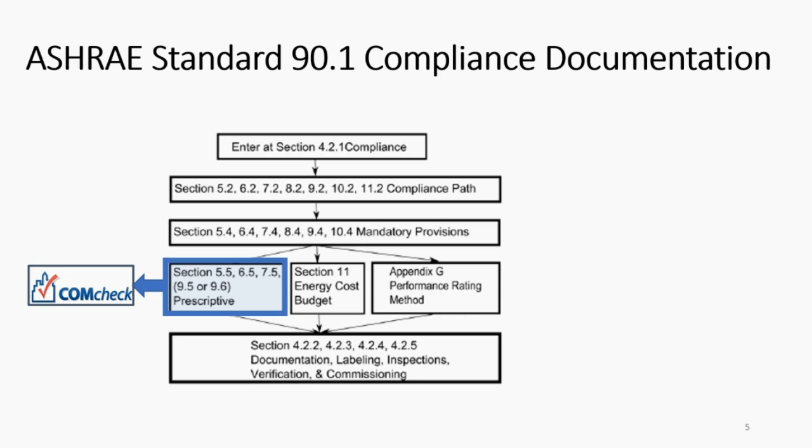However, for the performance-based paths in 90.1, which are Section 11 and Appendix G, previously there was no equivalent to ComCheck. However, now with funding from the DOE, a compliance form was developed in order to document performance-based compliance per the requirements of 90.1. Similar to ComCheck, in addition to supporting the reporting requirements of 90.1, the compliance form also includes functionality to assist reviewers in verifying that the project is in compliance. For example, and you'll see this today, there is a quality control checks tab in the compliance form that automatically flags inconsistencies and potential areas of non-compliance in the compliance form.

I just want to provide a high-level overview of the compliance form. It supports ASHRAE 90.1 2016 and 2019 for Section 11 and Appendix G. It's posted at the DOE Building Energy Codes Program website.

Just a brief summary of features: it's in the Microsoft Excel format, and like I said before, it provides a format for submitters to meet the reporting requirements of 90.1. It has built-in calculators and code lookups to help modelers establish modeling inputs. And it allows importing simulation results from the popular building energy modeling tools directly into the compliance form. It also automates the compliance calculations, which for Appendix G can be quite complex.

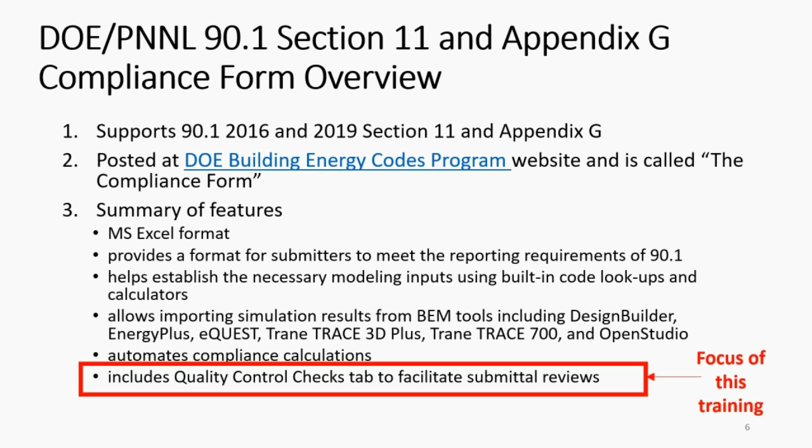It also includes a quality control checks tab, which is designed to help facilitate the submittal review process and is a companion to the review manual, which I will talk about now. But today's training is focused on this quality control checks tab.

It includes strategies for prioritizing the submittal review, essentially strategies for deciding which review checks to conduct. It includes a list of review checks which are implemented in the compliance form on the Quality Control Checks tab. So the Quality Control Checks tab includes all of the review checks in the review manual.

For each check in the review manual, the relevant sections of 90.1 and their requirements are described. There are review tips, including the specific steps for actually conducting the review and where to find the information in the compliance form to verify compliance with the review check, and then a discussion of common mistakes.

It also includes simulation reports that are annotated for the common building energy modeling tools, and on these reports are tips for conducting the actual review checks. The focus of today's training will be on these high-level concepts associated with the review manual.

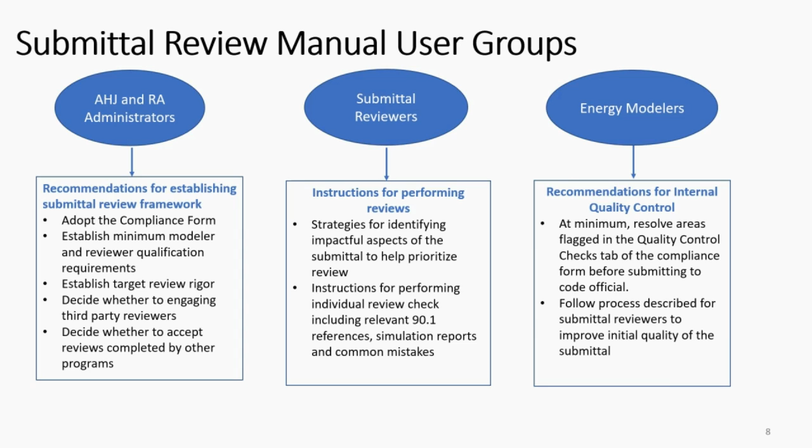So now we're going to go into some general submittal review concepts. Let's start with the general concept of performance-based compliance.

In performance-based compliance projects, there are two models: our proposed design model and our baseline, or in the case of Section 11, our budget design model. For the baseline or budget design model, the modeling inputs are based on the requirements of 90.1. For example, for Section 11 projects, the baseline model inputs for efficiencies and other building components are set at the prescriptive and mandatory requirements in sections 5 through 10.

The proposed design model is basically the building as designed. To determine compliance, the energy cost associated with the proposed and baseline models is compared. There are some things that are consistent across the two models: it's required to use the same simulation tool, weather file, and it's required that the utility rates be consistent across the two models.

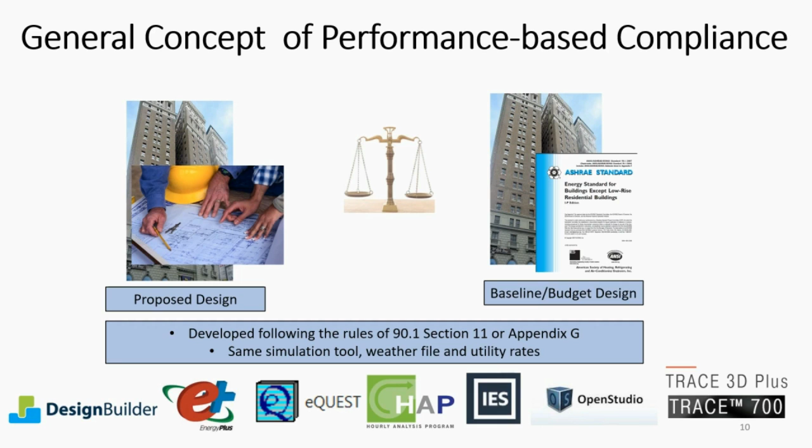I'm not going to dive too deep into these different aspects because we're going to go into them deeper on future slides. So as I said, step 1, you check the submittal for completeness. Step 2, you need to develop a general understanding of the project in terms of number of floors, square footage, the different building areas, whether there are any yet to be designed systems.

Step 3, establish the review scope. Which checks should be included in the review? What are the impactful systems and components? This is actually automated in the compliance form, and a preliminary recommended set of checks is provided for the reviewer.

Step 4 is where you actually perform the review, and this will be performed using the Quality Control Checks tab in the compliance form, while you have open the actual review manual so you can consult it for details regarding each check, and so you can look at the annotated simulation reports in the review manual.

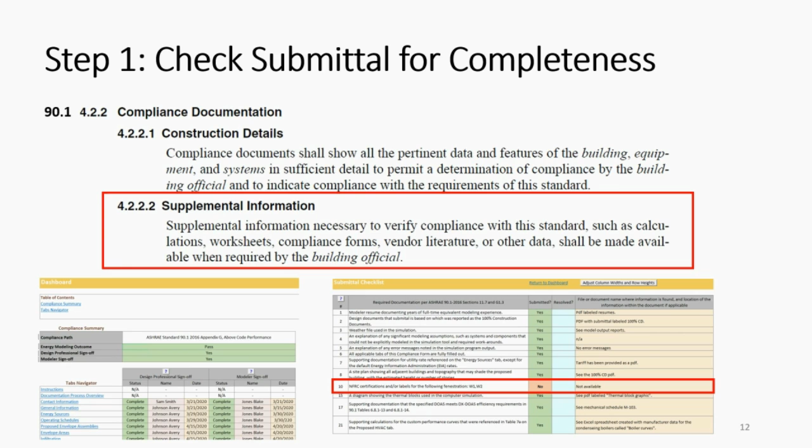And lastly, I want to point out item number 10, boxed in red on the submittal checklist below. This is where the design team or modeler marked not available for the NFRC certifications or labels for fenestration. This is a very common issue, so we suggest you consult the review manual. It has a list of appropriate documentation for this particular item, as a way to know exactly what to look for when reviewing the documentation submitted for a particular submittal.

Okay, step 2 is to develop a general understanding of the project. This is primarily done in the compliance form on the general information tab. This is where you can see the square footages of the building, the different building area types, and the number of floors associated with each building area type. It's also where you can see if there are any yet-to-be-designed components or systems in the project, because these have special rules, so you'll need to know about them when conducting your review.

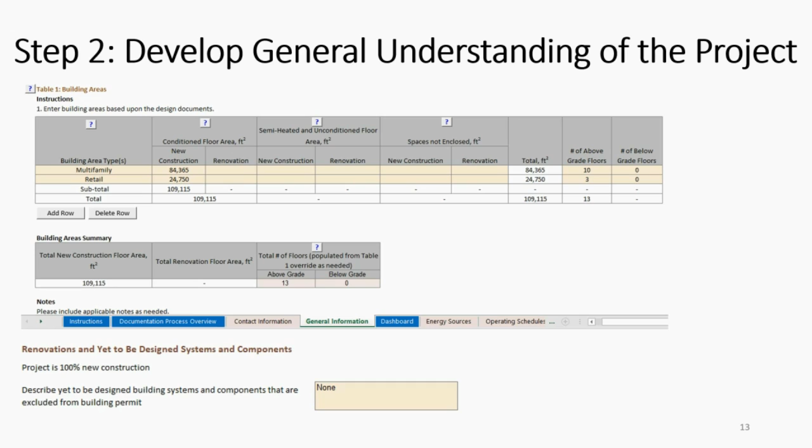Step 3: establish review scope. The first action for step 3 is to determine the impactful end uses in the project. First you need to think about the metrics used to determine compliance for your project. In 90.1, it's cost. Some jurisdictions use other metrics. In our example here, we're using energy cost.

This methodology is described in the review manual, but it involves three things. You need to figure out which end uses contribute the most towards the difference in energy costs between the baseline budget and proposed models. The top 3 in that category would be considered impactful. Then look at the top 3 end uses that contribute towards the total energy cost in the proposed design, and then do the same thing for the baseline budget design.

End uses that should not be considered impactful are those where trade-offs are not allowed. For example, for Section 11, trade-offs are not allowed for exterior lighting. So even if exterior lighting contributed significantly to the budget design, if it was one of the top 3, it would not be considered impactful because it's not eligible for a trade-off.

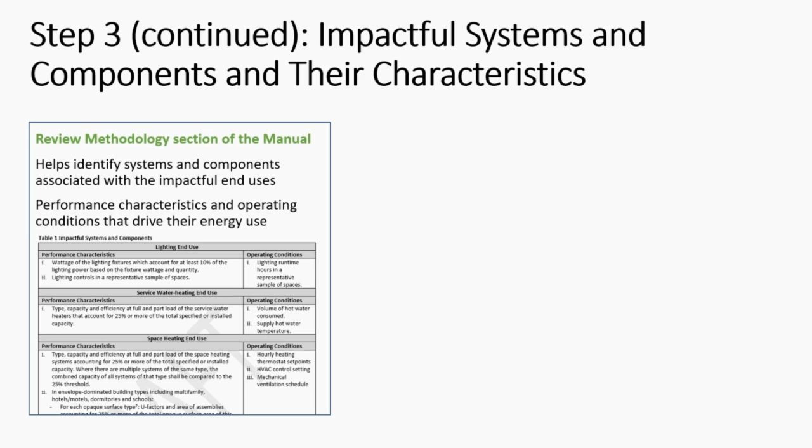Step 3 continued. Once the impactful systems and impactful end uses are identified, it needs to be determined which performance characteristics and operating conditions associated with those end uses drive energy consumption in the project. For example, if lighting is an impactful end use, we would look at table 1 in the review manual, which provides this information and shows that the wattage of the fixtures and the quantity drive energy consumption. In terms of operating conditions, the lighting runtime hours drive energy consumption.

The compliance form will select checks as yes or no based upon the automatically determined impactful end uses. So the compliance form will preset review checks using the methodology in the review manual that I'm describing here, based on the identified impactful performance characteristics and operating conditions. These will be the preliminary recommended review checks.

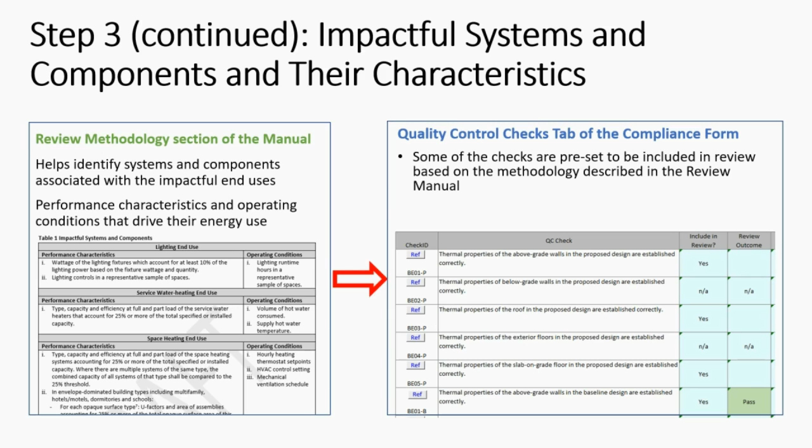Okay, so step 4 is to actually perform the review. First I want to start with the review check nomenclature that is both in the compliance form and in the review manual. The review checks are organized into the categories shown on the slide by building system, and each category has an abbreviation associated with it.

The review checks are in the format where it goes the abbreviation associated with the category, then a number, then dash either B or P, depending on whether the check is associated with the proposed design or the baseline budget. So as an example, check BE08-P is check number 8 related to the building envelope for the proposed design.

Step 4 continued, we'll go over the types of checks. There are 7 types of checks in the review manual, and they either apply to the proposed design, baseline design, or both. They're either always performed based on sampling, or only for impactful systems and based on sampling. You can observe that in the 2 columns on the right as I go through the different types of checks.

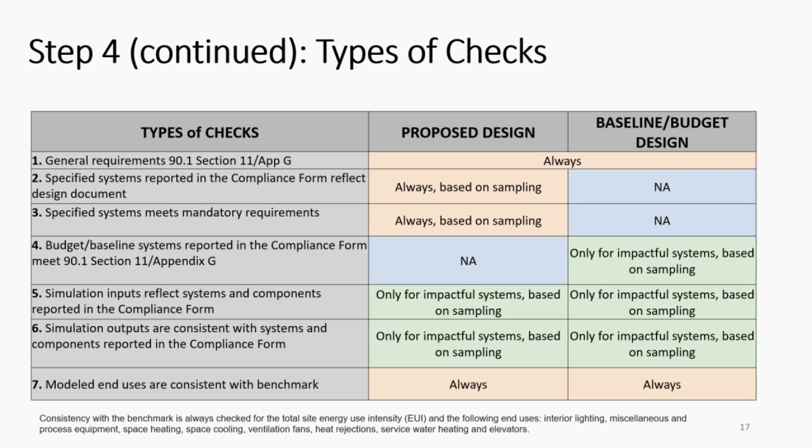An example of this type of check would be if the baseline HVAC systems have no electric heating, you would check to make sure that there's no electric space heating modeled in the baseline. And the last is whether the modeled end uses are consistent with benchmarks. We'll go into these benchmarks in more detail when we do the compliance form demo.

The next aspect of conducting the review checks that I want to talk about is coming up with the sampling strategies. This is included in the review manual, and there are recommendations for how to determine your sample. The compliance form has helper tables on the quality control checks tab to help with this process.

Just as an example, for checks that verify specified fixture wattages, for when you want to verify that the wattages reported in the compliance form are consistent with design documents, you want to focus on the fixtures that contribute the most to the wattage in the project. If there's a fixture that is 10 watts and there's only one of them in a project with hundreds of fixtures, it's not an efficient use of time to check that fixture.

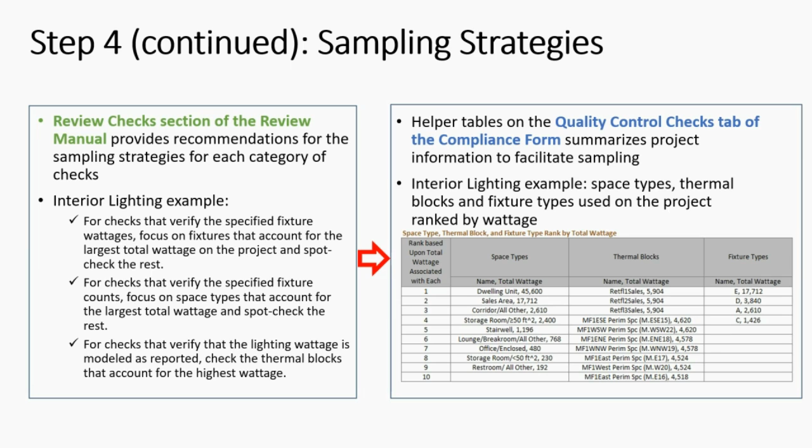Then for certain checks, the pass-fail review outcome is automatically set to pass or fail based on the information available in the compliance form, which can perform calculations automatically to determine the outcome.

For checks that are automatically determined as fail, there is a default review comment that populates automatically for that particular check. Actually, the Rev 0 iteration of the review is simply between the design team, modeler, the compliance form, and these automated checks. So they will need to address the checks or provide a response in Rev 0.

So the review check organization in the review manual is such that there is a check ID and title. Then, as I said previously, there's a description of the relevant sections of 90.1 for 2016, 2019, and for both Section 11 and Appendix G.

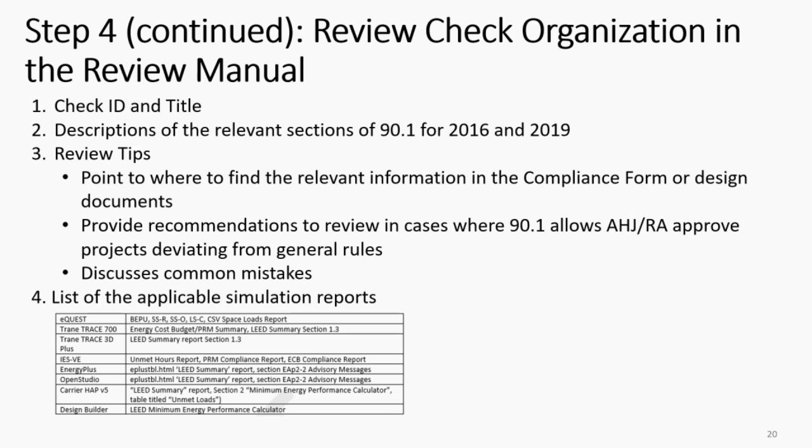There are discussions of common mistakes, and then there are lists of applicable simulation reports for common simulation tools. And then there's a simulation reports section of the review manual that consists of annotated simulation reports for the tools listed on this tab, and helpful tips on how to review these simulation reports to conduct the review checks.

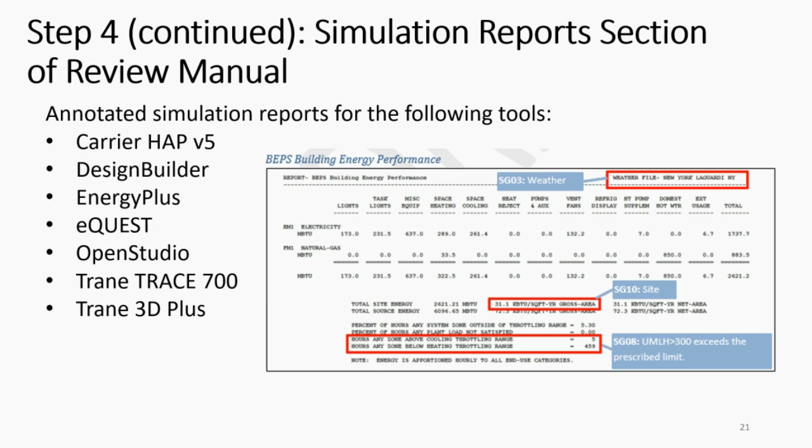Lastly, we just want to touch on step 5, which is the communication of the review outcome to the submitter. So on the Quality Control Checks tab, for each review check, there are fields for providing comments to the submitter, and then for the submitter to provide responses.

So the response may be that the issue was corrected, or there might be a justification for the issue provided, and this goes back and forth across iterations.

Okay, now we are going to dive into the actual compliance form, and we're going to go over the tabs that we've been discussing so far throughout the PowerPoint presentation.

During the compliance form demo, we're going to go over steps 1 through 3 of conducting the review in detail, and then we're going to touch on steps 4 and 5.

This is the compliance form, and this is the first tab that you will see when you open the compliance form. It's the instructions tab.

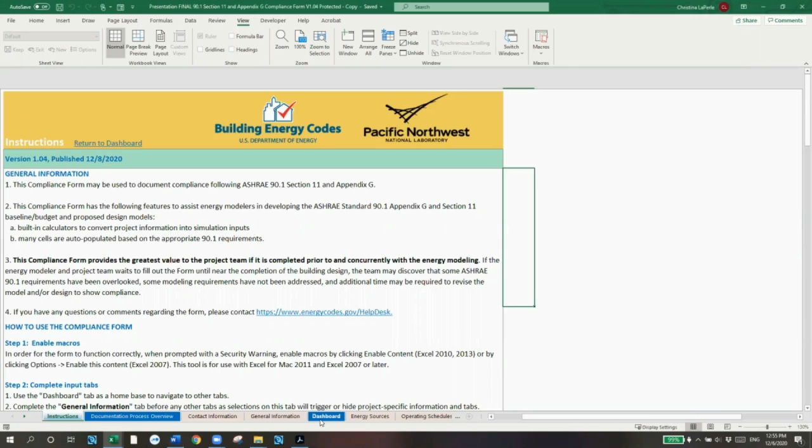And the dashboard tab has a number of features. One is that it allows easy navigation of the compliance form. So on the left here, you can see all the tabs in the compliance form, and they're hyperlinks, so you can click on them and go straight to those tabs. Once you're there, you can click Return to Dashboard and come back.

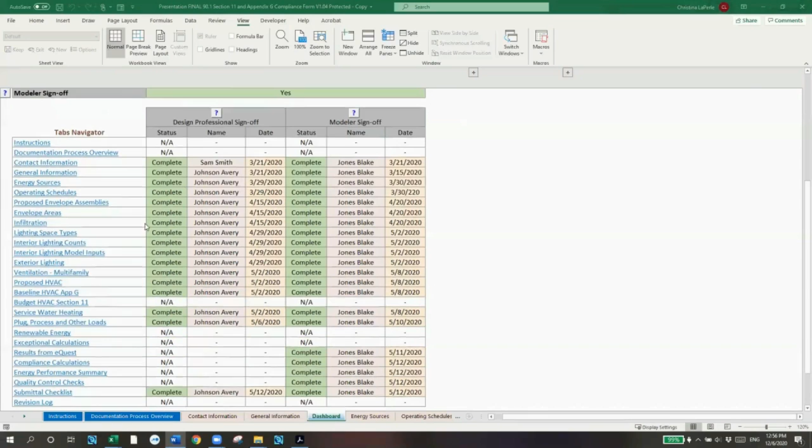As you can see, each tab has a complete status, and a name and a date for the design professional and modeler associated with it. Essentially, for the submission, the design professional signs off on each tab that's relevant, verifying that the inputs on the tab align with design documents. The modeler signs off on each tab to verify that the modeling inputs shown on each relevant tab align with what's actually modeled. So at a glance at the top here, you can see the compliance path associated with the project.

So our case study here, since we're in step 1, which is to verify the completeness, we're looking at the dashboard tab, but this also gives us some basic information, which is the fact that it's an above code submittal and it's for Appendix G 2016.

Under this, we can see whether or not the design professional and modeler has signed off on each of the relevant tabs. This will show green and say yes if that is the case. So it's up to the rating authority or authority having jurisdiction whether or not the policy is to send back submittals for correction if they come in and not all of the tabs have been marked as complete.

For example, if a tab is in progress, it'll show no here for the design professional sign off, and it could facilitate a more efficient review process to send it back and have them ensure that everything is complete prior to diving into the detailed review.

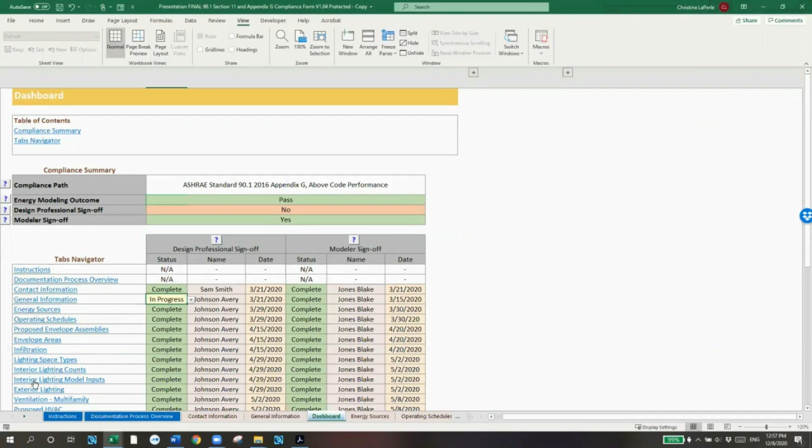The other aspect of checking for submittal completeness is to review the Submittal Checklist tab. This is a checklist to ensure that the submittal meets the documentation requirements of 90.1. As the design team and modeler verify that the package includes each of these items which align with requirements of 90.1, they mark it as yes, submitted.

Then they would provide here in this column the location of the particular item in the submittal package. There is space across review iterations for the reviewer and the design team and modeler to respond with comments. If something is missing or inadequate, the reviewer can provide comments and the design team can address and respond. As we discussed previously, in our submittal they did not provide NFRC certification or labels for fenestration.

So it may be the policy to send the submittal back so they provide it, but it's up to the particular jurisdiction or rating authority.

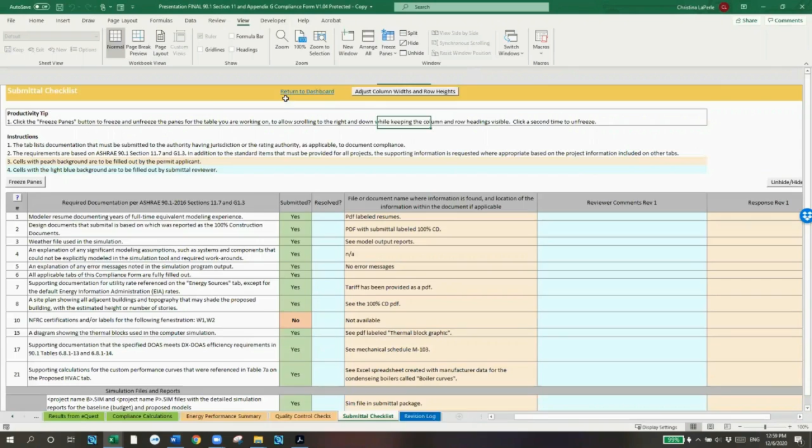So the next step in our review process for our case study is to develop an understanding of the project. To do that, we're going to go to the General Information tab and look at the basic project information. We already saw on the Dashboard tab that this is an Appendix G 2016 submittal, and it's an above code program submittal at the 100% construction document stage, with some other general information in this section.

In this tab, it shows us the building areas associated with the submittal. We can see that there are multifamily and retail building areas, and we can see the associated square footage and number of floors. Because there's multifamily, we can also see the number of dwelling units, the square footage associated with them, and the number of bedrooms.

Down in this section, we can see whether or not there are yet to be designed systems and components in the submittal. This is important because there are special rules in 90.1 for yet to be designed building systems and components, so we need to know this going into the review. In this case, there are none. So we have a multifamily building that is 13 stories above grade, with floors 1 through 3 consisting of retail, all fully designed.

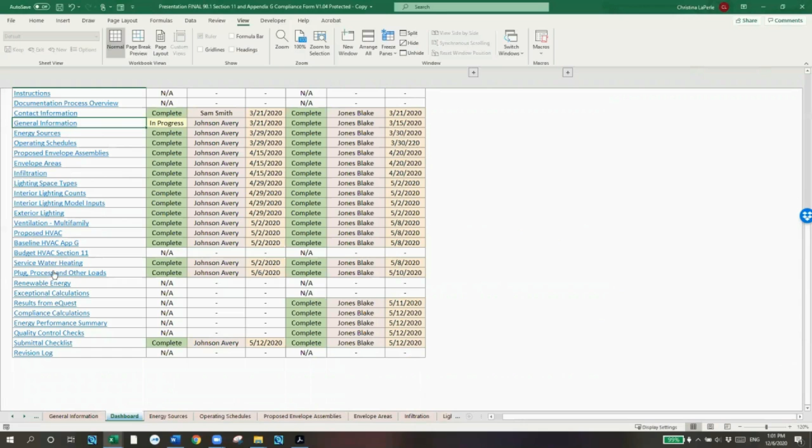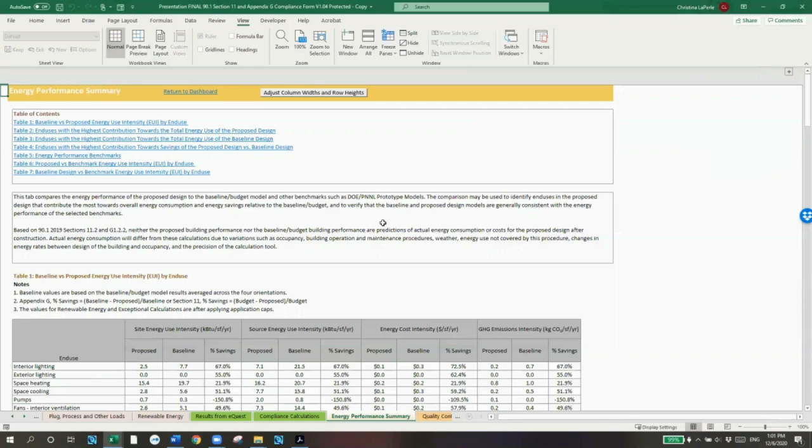So our next step in our review process is to establish the review scope. To do that, we're going to head to the Energy Performance Summary tab first. This tab compares the energy performance of the proposed design to the baseline, and then also to various benchmarks. Those are the main items on this tab.

In the first table, we have a table that compares the baseline and proposed consumption across different metrics between the baseline and proposed for different end uses, on a per square foot basis. Then, as you've seen in the PowerPoint, tables 2 through 4 rank the various end uses by their contribution towards either the proposed design, the baseline or budget design, and the savings across the proposed and baseline design.

So in our case study, if we want to figure out what are our impactful end uses, we would look at these tables. The metric for our case study to determine compliance is energy cost, so we're going to focus on the energy cost columns here. We can see that in terms of the proposed design, miscellaneous equipment, space heating, and space cooling contribute the most in terms of energy cost.

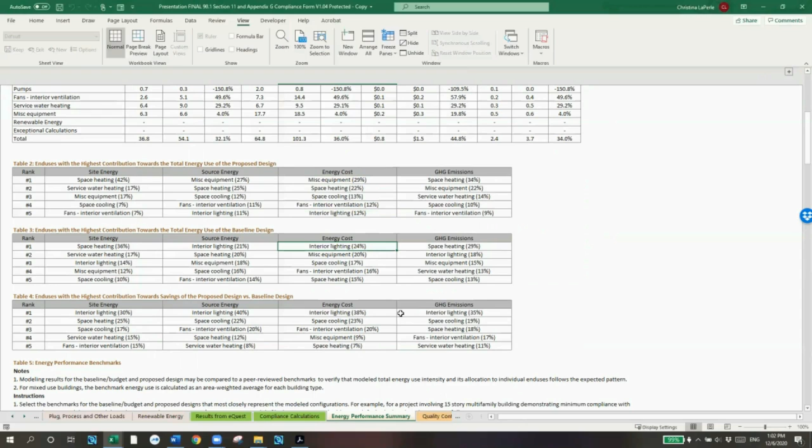In terms of the baseline, it's interior lighting, miscellaneous equipment, and space cooling. And then in terms of savings, the most savings are derived from interior lighting, space cooling, and fans. So from this, we can see that our impactful end uses are miscellaneous equipment, space heating and cooling, fans, and interior lighting.

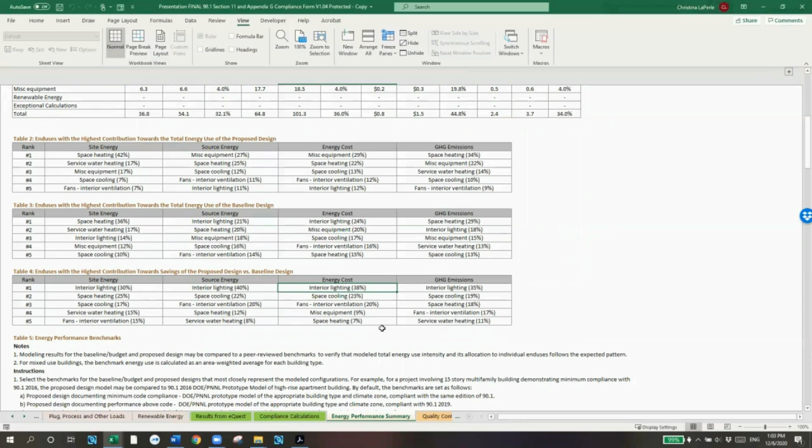Okay, so the next table, table 5, is where the user sets the benchmarks. What are we going to compare the baseline and proposed models to? There are defaults, which are set for the proposed design at the next edition of 90.1 for above code submittals. So in this example, it's a 2016 baseline.

So the proposed benchmark is the PNNL models associated with 90.1 2019. And then the baseline, because our baseline for an Appendix G model is approximately 90.1 2004, it automatically sets our benchmark as the PNNL prototype models for 2004 for the associated building types. These can be overridden if the user would like, but these are the defaults.

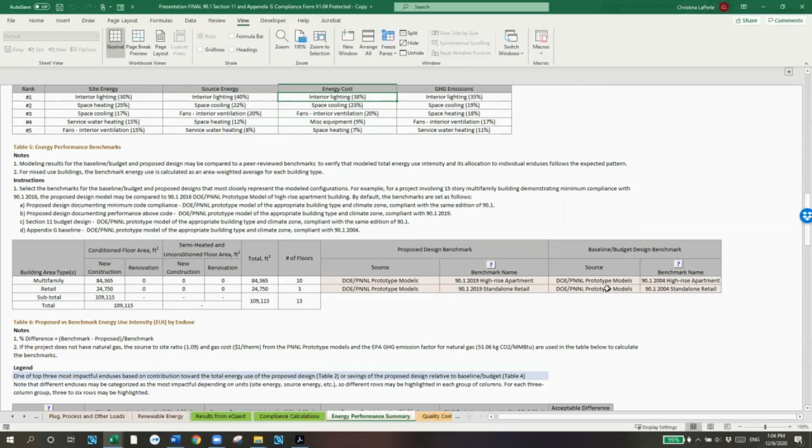So then our tables 6 and 7 below basically compare our actual results for the proposed and baseline to the benchmarks. Looking at table 6 now, in terms of site energy, this column shows the proposed EUIs, and this column shows our benchmark EUIs, and then we can see the percent difference. This is a great way for modelers to QC their models, to see how far the model deviates from the benchmark. Over here on the right are the acceptable differences before there's a QC flag.

There will be defaults here, but the reviewer is able to override these based on the policies of the authority having jurisdiction or the rating authority.

And these will flag on the QC tab if the percent difference for the various end uses exceeds the allowable limit.

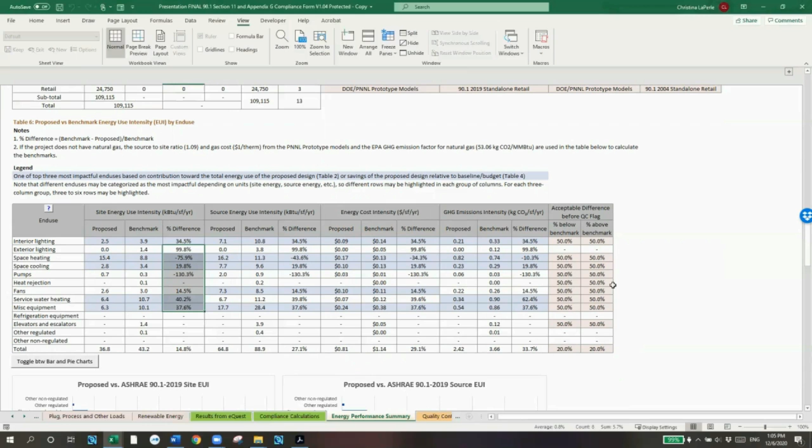Below this table there are charts, so these tables are in chart form. You can toggle between pie charts and bar charts just to look at the data in another format if you prefer. Below this, we also have Table 7, which is the same information but for the baseline versus benchmark data. This blue indicates the impactful end uses, so for cost: interior lighting, space heating, space cooling, fans, and miscellaneous equipment. It calls it out right here for us directly in the table.

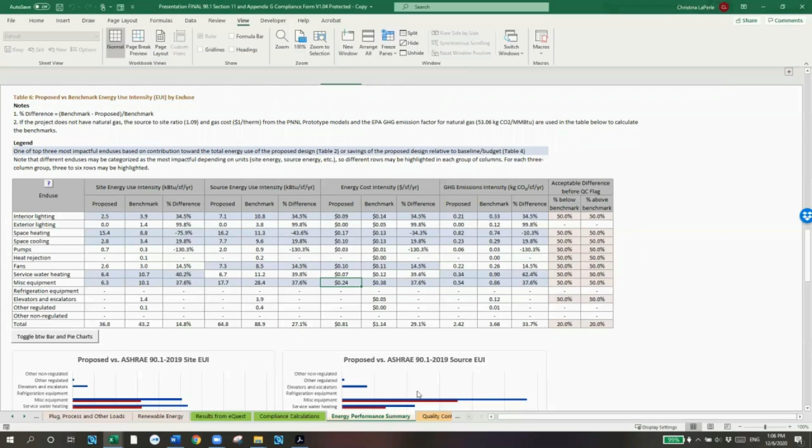Once we've identified our impactful end uses, we move on to the Quality Control Checks tab. As you can see, the compliance form automatically identifies the impactful end uses.

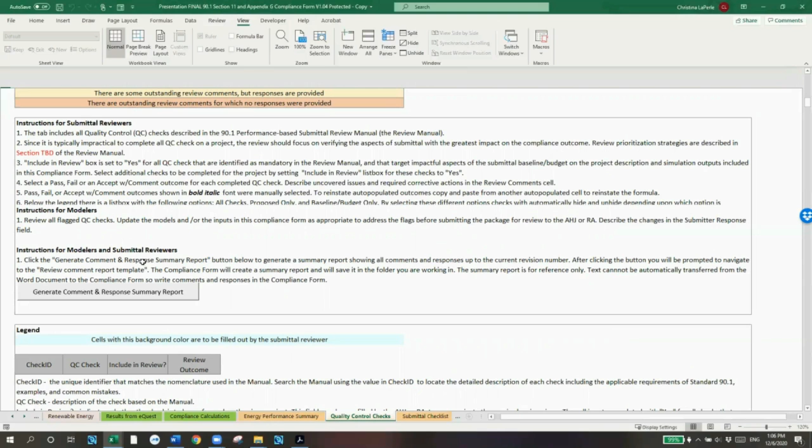On the Quality Control Checks tab, before diving into the actual review checks, I want to give a brief overview of the different features on this tab. At the top we have the Submittal Review dashboard, then instructions for submittal reviewers and modelers, then instructions for generating a Word document report, then a legend section to provide the meanings of the various headings, and then the individual review checks. So that's a high-level overview of what's on this tab before diving into the details.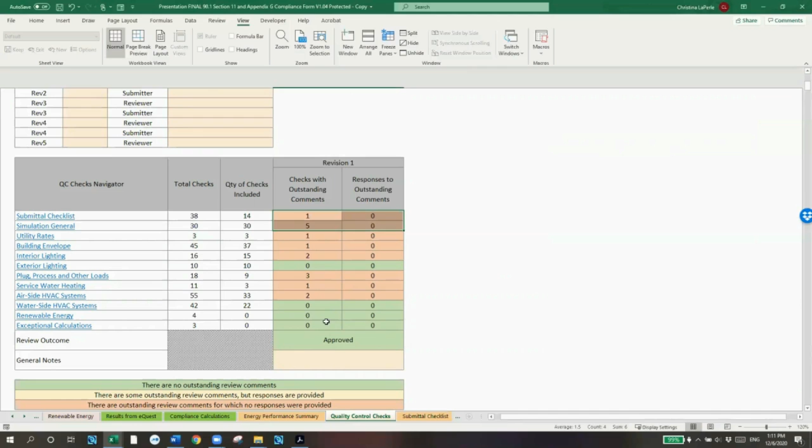So if this is 0, that means there was a fail and no response was provided, and it could be the policy of the rating authority to send it back if the checks aren't addressed. The color coding is: red if the submitter has not responded to all outstanding checks in that category. If they have, it turns yellow. Green means there are no checks in that category.

Then down here we have the review outcome, which has options like respond to comments, shown in yellow, and once it's approved, it turns green and says approved.

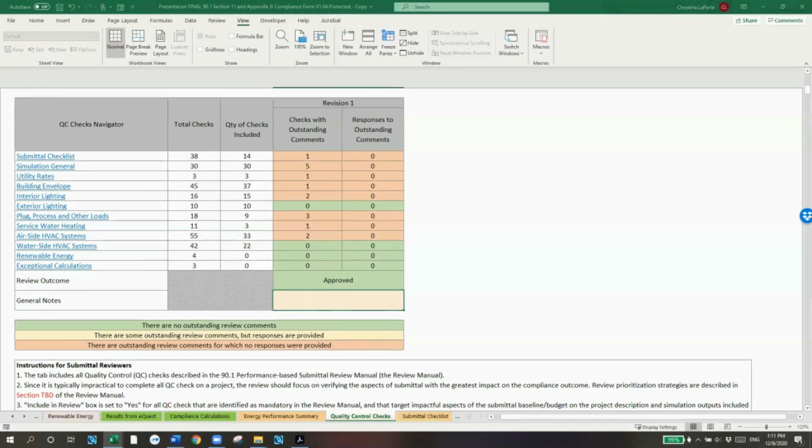Okay, so the next row here are the general notes, and I want to show you a feature of the compliance form. This is for any general notes that the modeler, design team, or reviewer want to provide to each other. Sometimes it's difficult in Excel to communicate in these free-form cells, so there's a feature where if you double-click on any free-form cell, a dialog box pops up where you can type whatever you want. It will populate that cell with the information, and when you double-click again, the dialog box pops up with that information so you can add to it, and it retains what's been typed.

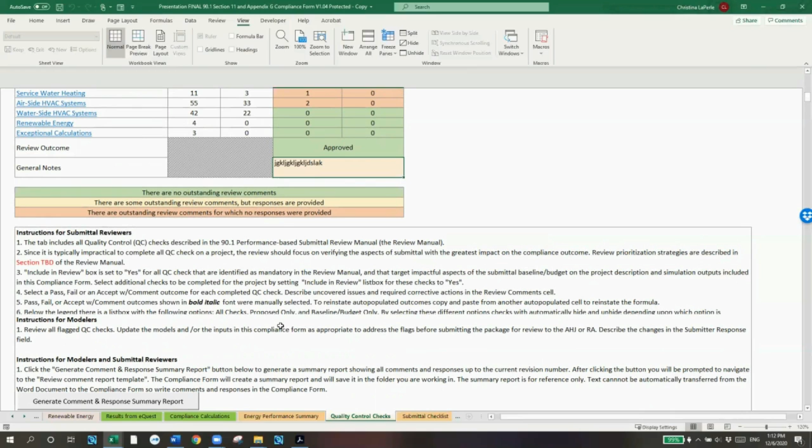Here are the instructions, and I'll get into more detail on them when we're in the actual review check section, so I won't go into that here. But I do want to show you there's a button for generating a Word document summary report, and I'd like to show you an example of that report.

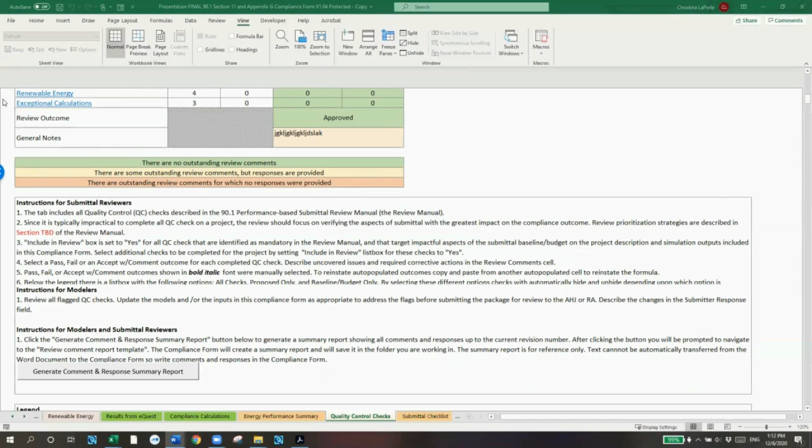The function of that report is to provide another form to look at the comments and responses. When you press that button, it generates a report with all the review checks in the project, showing the comments and responses. We're at Rev 0, so no one has entered comments or responses yet, so these are blank. If comments and responses were entered, you would see text here.

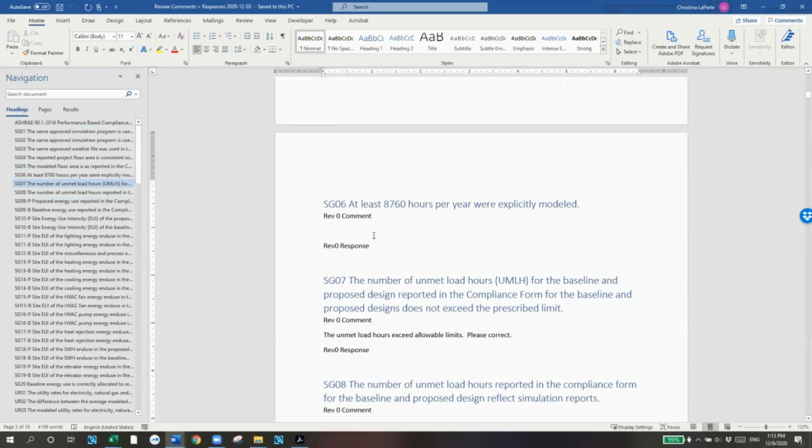For example, we have an auto-generated comment down here at SG07, so it populates there. But if you were at, say, Rev 4, you would see the complete history from Rev 0 to Rev 4 of the comments and responses. Even over here on the left, because these are stylized headings, you can use the navigation pane to easily jump to different checks, as another way of reading through the history of comments and responses for the different checks.

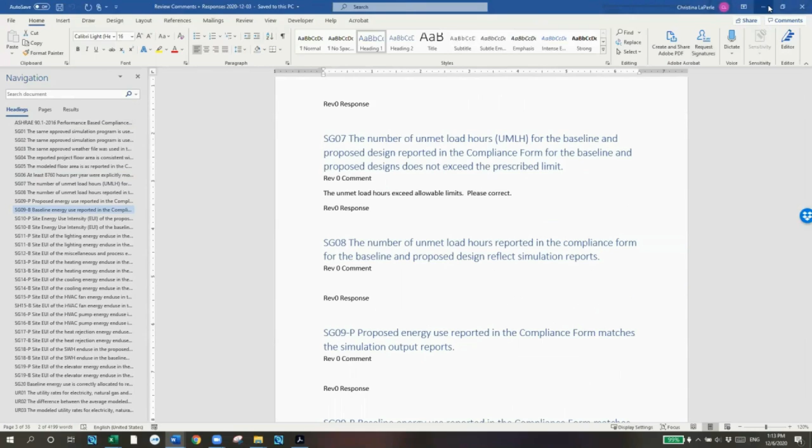Okay, so now let's jump down to the actual checks. Oh, one more thing before we get there: there is an option to filter the checks. As you know from the PowerPoint, we have baseline budget checks and proposed checks, so you have the option of looking at all checks, only baseline checks, or only proposed checks. Some reviewers like to do all the proposed design checks and then all the baseline design checks, depending on personal preference. This filter makes that more easily accomplished.

Okay, so as you move to different iterations - the first iteration is between the compliance form and the submitter - as we can see here, SG07 is an automatic check, and we'll go over this shortly, but it flagged as fail and an automatic default comment populated. So it's up to the modeler to address this comment and provide a response. If it is addressed, the check will turn to pass and they won't need to provide a comment. But let's say there's a justifiable reason for the unmet load hours - they would provide a response in this box here.

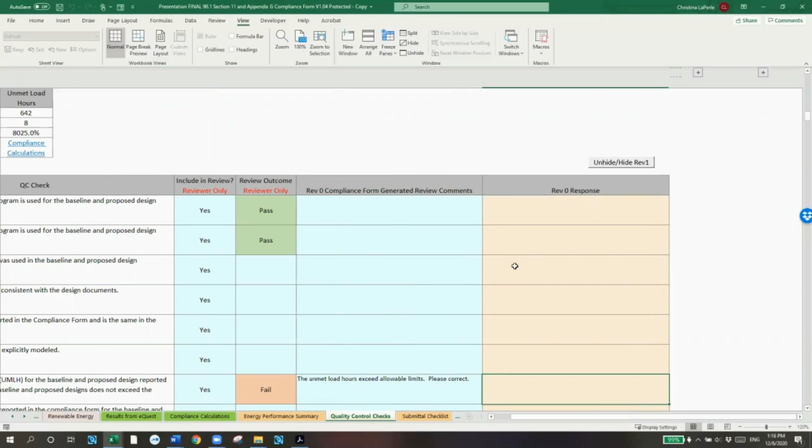Okay, so when you move to the next review iteration, you need more fields for entering comments and responses. You just click this button, and it unhides the next set of review comments and responses. And if you don't want to see them - say you're out at Rev 4 and don't want to see all the previous ones - you can just press the button and it will hide them.

There's also a feature that allows you to freeze the panes, because as you get out to Rev 4, Rev 3, you'll want to be able to see the check that they apply to. So you can just click on the freeze panes button and scroll across, and if you click it again, it'll unfreeze the panes.

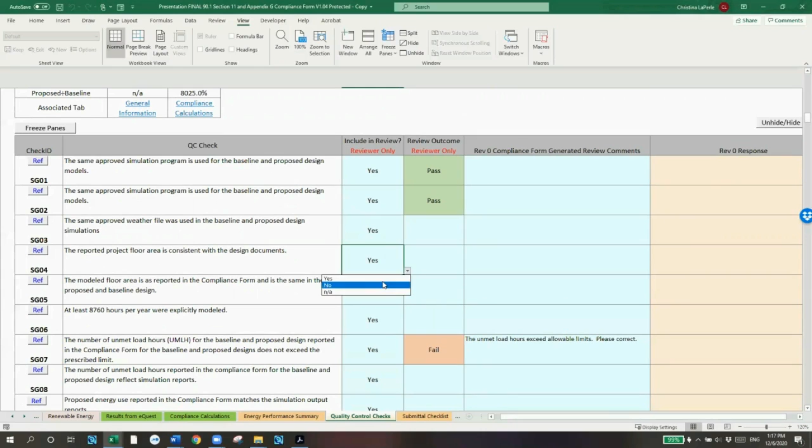Okay, so let's look at the actual review checks themselves. If a check is overridden, so right now these are all auto-populated, it will show in bold orangish brown color. So let's say the modeler or reviewer said, I want to change this to pass. Well, it turns to orange. So that's just a way of easily seeing what has been overridden.

Let's say you override something and you're like, oh no, I didn't mean to. All you have to do is copy the row below and then paste it in the cell that you overrode, and it will reinstate the information for you.

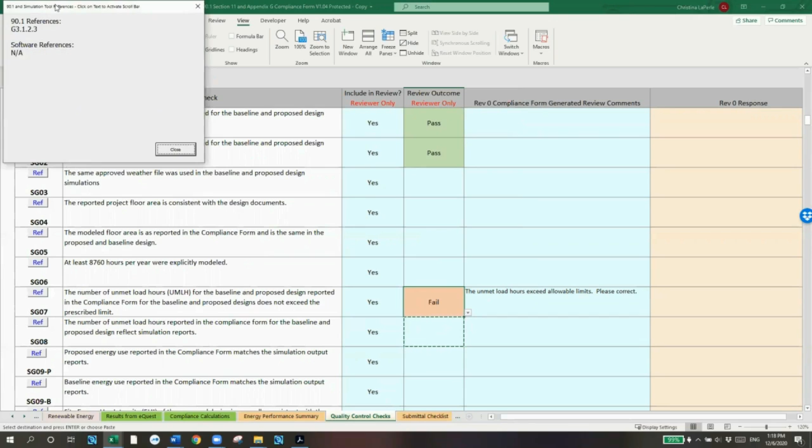Another feature I'd like to show are the reference information provided for each check. If you click on this, a box will pop up and give you some relevant information about that check. So in this case, it tells us the 90.1 references associated with the unmet load hours check. Now, software references for this check are NA, so it says NA.

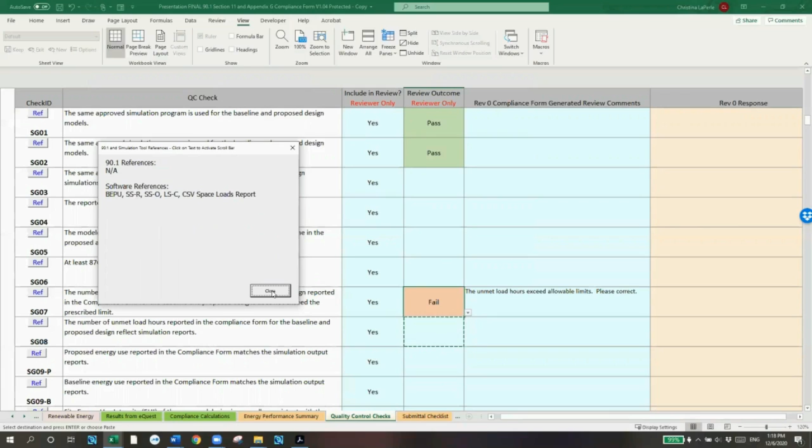But let me click on a check where they are relevant. So the one below is checking unmet load hours in the compliance form with actual simulation output reports. Now we see that it's showing us the relevant simulation output reports. It's just an easy way to access that information as you're going through the review checks.

However, you will want to have the review manual open while you're going through the checks so that you can access all of the details associated with conducting the check. So I have the review manual open here, and I just want to show you this process, okay?

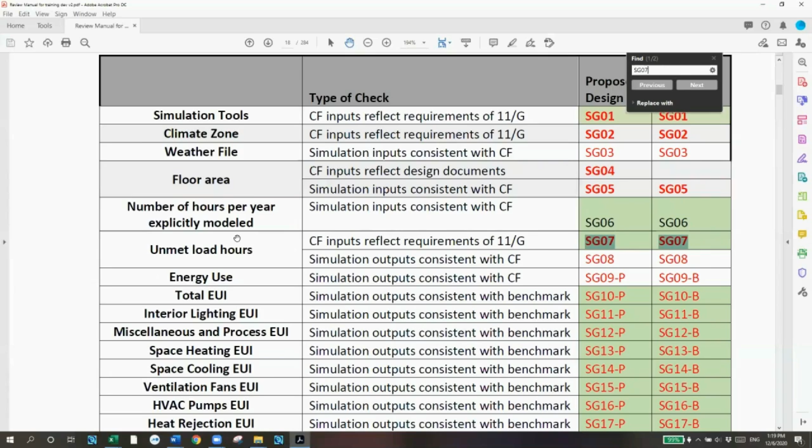So if I'm interested in finding out more information about conducting check SG07, I'd have my review manual open, and I would just do a Control F, type in SG07, and navigate to the check. Once I'm at the check, I can see all the relevant sections of 90.1 and a description of those sections. Then I can see the review tips with enforcement recommendations, like when it would be acceptable to approve this unmet load hours check when the unmet load hours exceed acceptable limits.

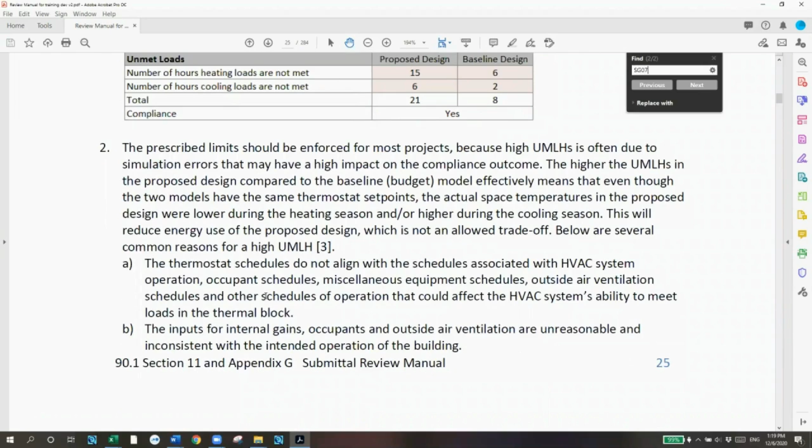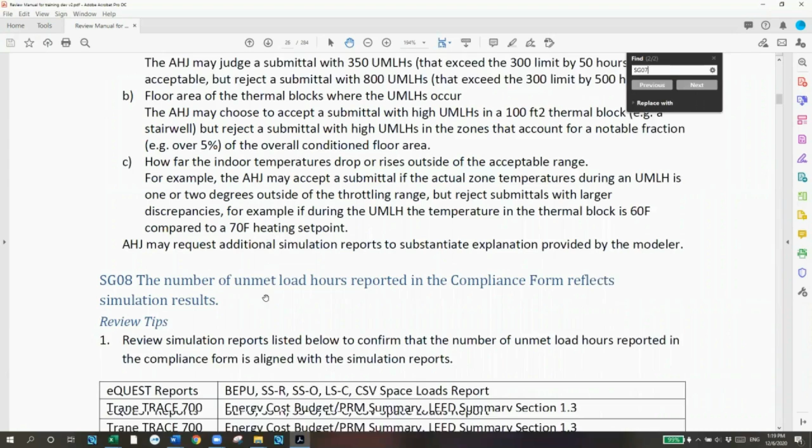I'd be able to see common mistakes. And then for checks that apply to simulation reports, I'd be able to see the simulation reports associated with common simulation tools.

So once I see my reports, I can also navigate to the annotated report section in the review manual. So I would go to eQuest in this case, and I've been looking at check SG08. That's the one we were on. That has to do with verifying that unmet load hours in the compliance form are consistent with the actual simulation output. So I can see SG03 here, SG08 here, and it gives me some tips on how to conduct the check. This is an example of those annotated output reports.

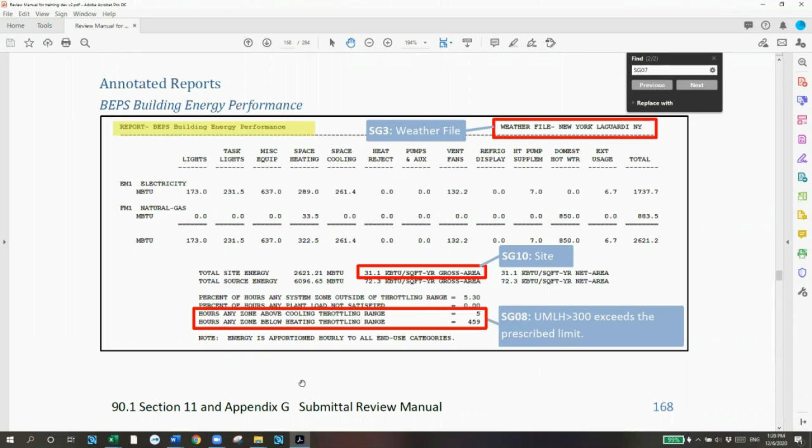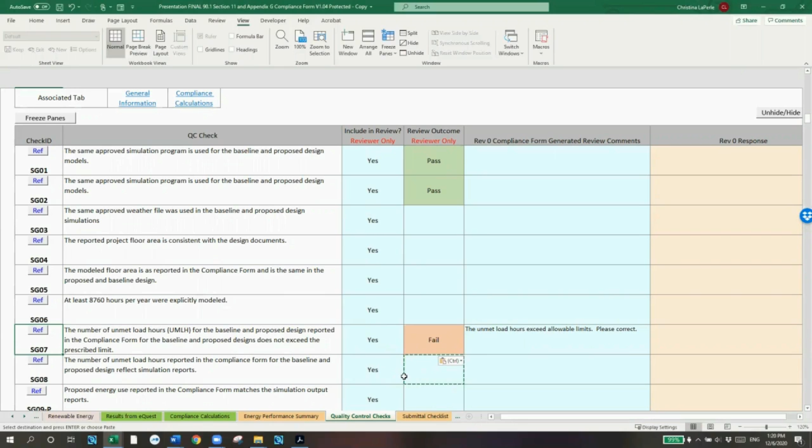Okay, so that concludes our demonstration of the actual compliance form. As you can see, there are automatic checks selected as being included in the review. I just want to summarize that these are based on the compliance form automatically determining the impactful end uses and identifying a preliminary recommended list of checks to conduct.

So you would go through each category as the reviewer and conduct the checks. Some are automated, like the two you see here. Some are not, of course. Checks like comparing between design documents and the compliance form cannot be automated. But yes, that is the compliance form.

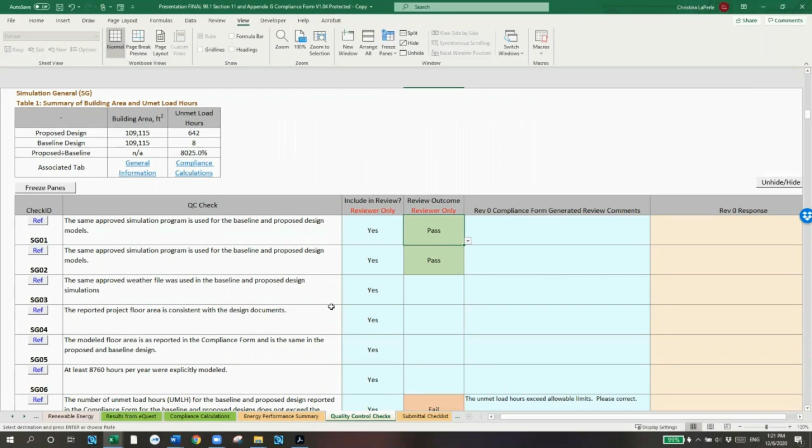So we're going to go back to the PowerPoint now and do some actual example review checks for our case study.

Now that you've had a taste of the compliance form, we're going to do some actual review check demonstrations.

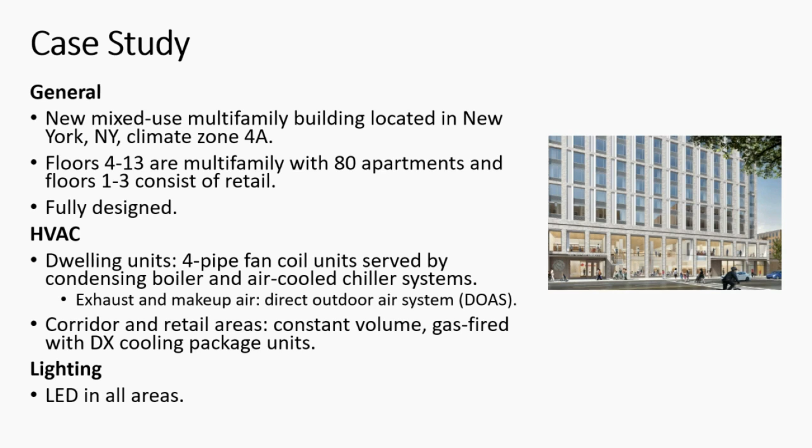This is just an overview of the case study. We already touched on some of these details in the compliance form, but to set the stage for the sample review checks, I want to remind you that the building is mixed use, multifamily with retail, fully designed, climate zone 4A. The dwelling units have 4 pipe fan coil units. The corridors and retail areas are served by constant volume, gas-fired with DX cooling package units, and lighting is LED. Just some high-level details to provide context for the review check demonstrations we're about to do.

Okay, we are going to start with the simulation general category. We are not going to be able to touch on every category today, but we will do a handful of the major categories. We are going to look at 2 types of checks in this category.

One is checking that the number of unmet load hours is compliant with the rules of 90.1 in terms of the allowed limits. So that's one of the general type checks we talked about previously. That's of type number 1.

Then we're going to check whether the lighting site EUI in the proposed design is consistent with the benchmark. That is check type number 7, checking against benchmarks.

Okay, let's get into the details of check SG07. As I said, it's a check that the number of unmet load hours reported in the compliance form do not exceed the prescribed limits in 90.1. Again, this is one of those general type checks.

So as we go through the review checks, just note that anything that refers to the review manual will be shown in green, and anything that refers to the compliance form will be shown in this blue color.

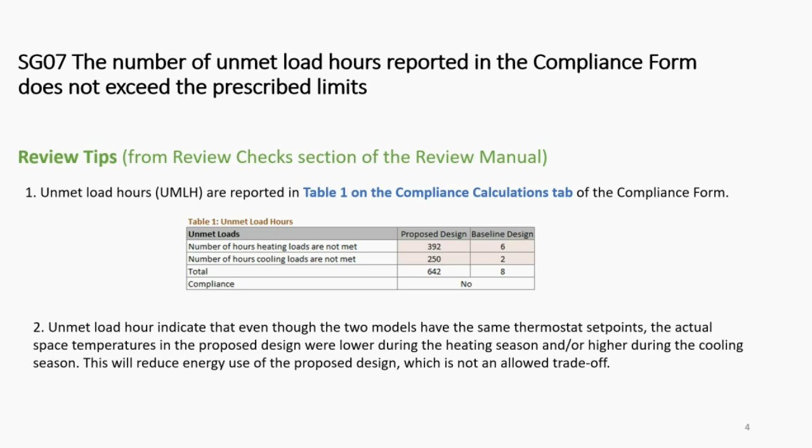Then there's a bit of background provided as to the rationale for conducting this check. If thermostat set points are the same in the baseline and proposed models, but there are higher unmet load hours in the proposed, that will actually result in less energy consumption. So basically, the project would be getting credit for under heating or cooling spaces in the proposed design, which is not an allowed trade-off.

So then in the compliance form on the quality control checks tab, this check is actually automated. You're seeing a screenshot of it here, and it's automated to fail based on table 1 on the compliance calculations tab. You also see that in the proposed design, there were 642 unmet load hours, which exceeds the 300 allowed limit.

And a default comment has auto-populated, so as a reviewer, we don't have to write a comment, it's there.

When you do craft a comment, if there isn't a default, you want to make sure there's a call to action. You don't want to just state an issue without providing what the submitter needs to do to correct it. In this case, we ask them to correct the fact that the unmet load hours exceed allowed limits. You can also say, please correct or provide an explanation, because often there are explanations for issues we encounter in reviews, so you want to give the submitter the opportunity to explain.

For an example, even in this scenario, and this is from the review manual, there may be circumstances where as a reviewer or a rating authority, we consider accepting unmet load hours that exceed the allowed limit. For an example, if it only exceeds the allowed limit by a small margin, let's say the unmet load hours are 315, in that case we might consider accepting that.

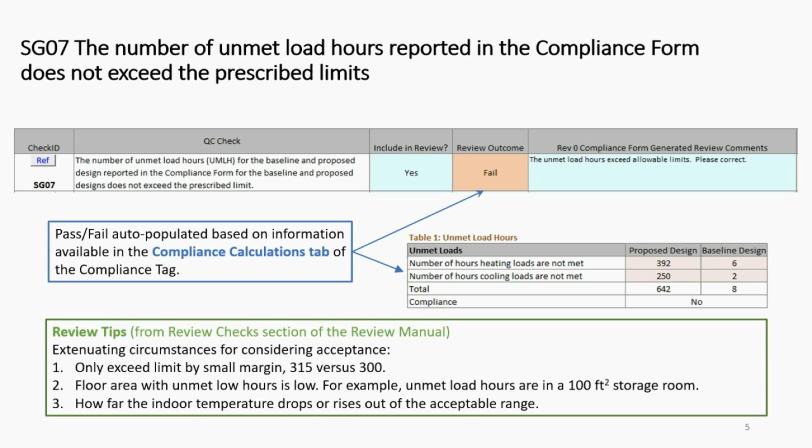And then another is how far below the indoor temperature drops or how far above it rises out of the acceptable range. So if it's only a degree or two, we may want to consider accepting it because it's relatively low impact.

The next step we're going to go over is whether the modeled interior lighting energy use in the proposed design is consistent with the selected benchmark and that the difference is less than the threshold. As you saw in the previous demonstration, the thresholds can be overridden by the reviewer.

So the rating authority or reviewer can set these thresholds. These are the instructions from the review manual, which instruct us to look at those tables on the energy performance tab to check that we are happy with those thresholds. And then we question the results if the difference between the modeled interior lighting EUI and the benchmark is outside of the limits that were set.

Some common mistakes when the proposed design is not consistent with the benchmark are that the lighting wattage is just being modeled as too high or too low. Maybe the fixture wattages were not entered correctly, or the lighting counts from the design documents were not correctly translated into the compliance form, or the lighting power densities were not applied correctly to the thermal blocks in the model.

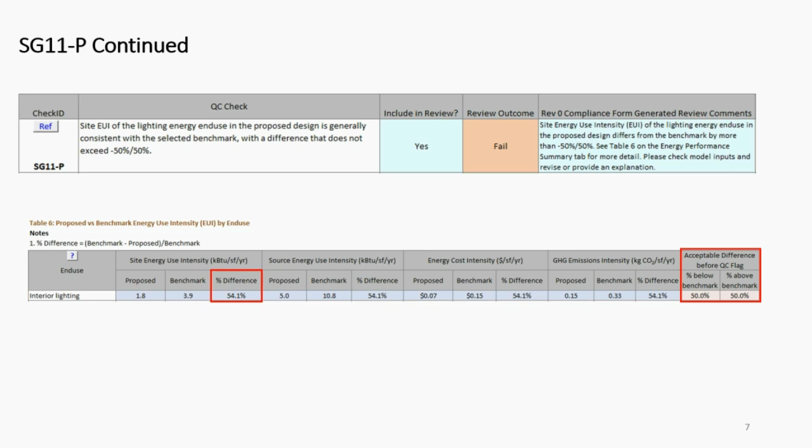And this does not mean that the submittal is incorrect. But what it does do is it tells us as reviewers that we really need to make sure that the design documents align with what's been entered in the compliance form and that the modeled LPDs align with the compliance form.

Okay, moving on to the building envelope category. For the building envelope, we're going to do a check where we compare the proposed design compliance form inputs to the actual design documents. Now, just to note that sometimes the outcome of one check can lead to another check becoming inapplicable.

For example, if we find that proposed design inputs in the compliance form were established incorrectly, well, we wouldn't then check whether the modeled values are consistent with the compliance form because they're incorrect. We would do that check once revisions were made.

So the other type of check, which is check type number 5, we're going to do is check that the modeled U values and areas of the above grade walls in the baseline design are as reported in the compliance form. So checking model output reports with the compliance form.

And lastly, I just want to point out that the compliance form automatically selected 2 checks shown here as NA, and that's because the compliance form knows that there are no below grade floors, so it set the checks related to below grade walls to NA.

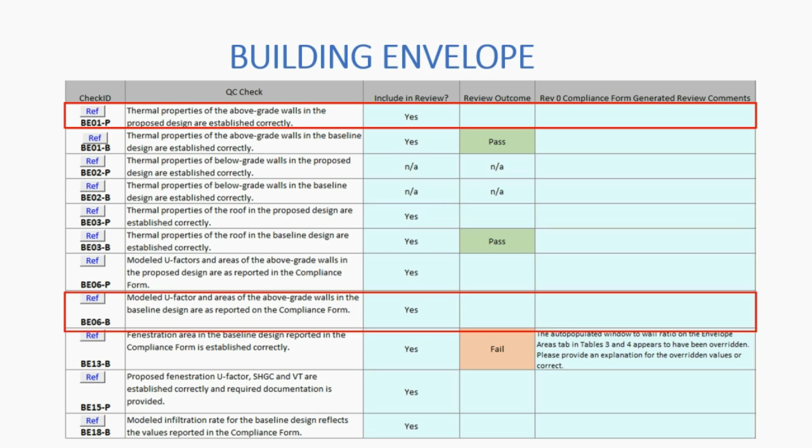Our first check is whether or not the thermal properties of the above grade walls in the proposed design are established correctly. So let's check out our review tips for this.

We will locate the selected constructions for review based on the plans and specs in Table 1 on the Proposed Envelope Assemblies tab. So first we need to find where constructions are described in the design documents. The focus of the review will be on the constructions with the highest wall area in the project. And there's a helper table in the building envelope section of the Quality Control Checks tab to help identify the constructions that comprise the largest area.

So then we're going to verify that the constructions in the design documents match the compliance form. We're going to verify that the modeled U factors are established correctly. And we also want to make sure that any uninsulated assemblies are captured correctly in the compliance form.

Some common mistakes, and this is very, very common, the overall assembly for a particular construction, the U value is established without accounting for thermal bridging, which is required per section 5.5.5.3. And the way to account for this is to use Appendix A, or that's the typical and probably the easiest way, using Appendix A of 90.1, which has lookup tables to determine the assembly U factor accounting for thermal bridging. So here's our example.

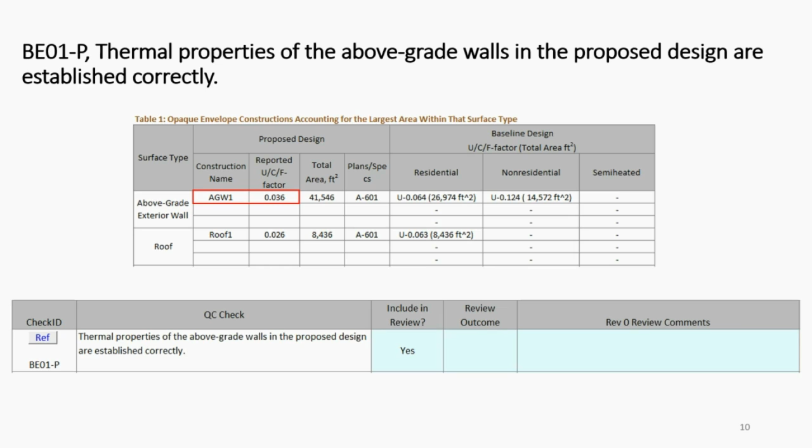Okay, so there's our check screenshot from the actual compliance form. We're going to conduct our check. Under the plan/specs column, we need to look at design drawing A-601. So we pull that drawing, shown in the bottom right corner, and we also have a zoomed up section showing the exterior wall assembly that's been captured above in Table 1 on the proposed envelope assemblies tab in the compliance form.

So here are the key items we're checking. Is the construction type captured correctly? Based on this screenshot, it's a 6-inch metal stud wall, 16 inches on center. So steel frame, that's correct. 16 inches on center with 6-inch depth, that's correct.

Then we look at our cavity and continuous insulation. I see that there's R8.5 continuous insulation, the 2-inch mineral fiberboard. And then I can see that there is also R19 insulation - looking at the 6-inch metal stud with 6-inch fiberglass batt insulation, R19. So confirmed, they entered that correctly.

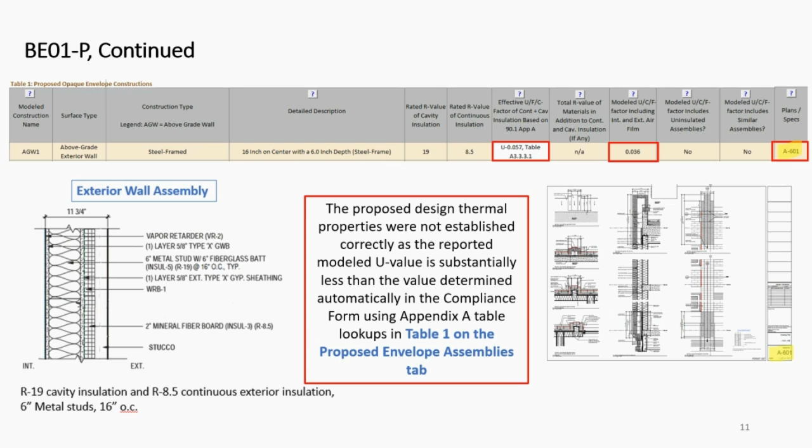Since we found that this is incorrect, we would not then do the later check for the proposed design to see if the modeled value matches the value here, because this value is incorrect.

Our next check is BE06-B, and this involves checking whether modeled U factors and areas of the above grade walls in the baseline design are as reported in the compliance form. As you can see, we have our review tips from the review manual, and it instructs us to compare the simulation reports from the building energy modeling tool to verify that the modeled U factors and areas of the exterior walls reflect the values reported in Table 1 on the Envelope Areas tab.

Now, these values are auto-populated, so we can easily compare them to the model output reports. We want to focus on the constructions that account for the largest above grade wall area, and we want to use sampling. So we will refer to our helper table in the building envelope section on the Quality Control Checks tab to figure out which baseline constructions account for the largest above grade wall area, and then we will check those. In our project we have a limited number of constructions, so we'll be checking, I believe, just one, but we'll see on the next slide.

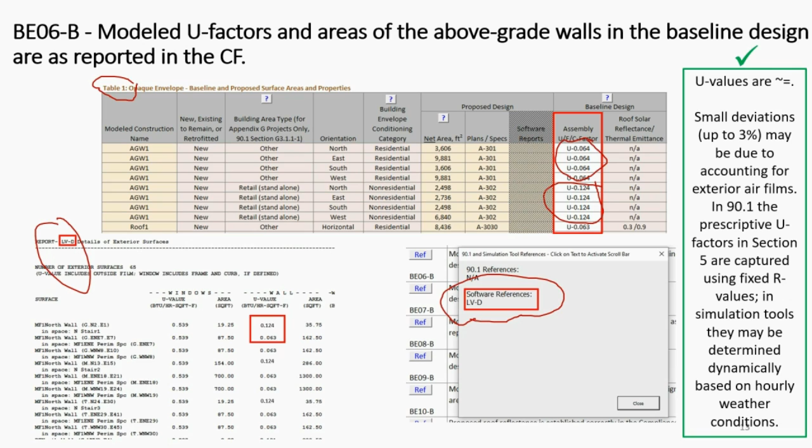All right, the other part of this check is to check areas. This is just a little snippet of this check. Same report, LV-D, and we look at table 1 again, and what we're going to focus on here are the areas of the north walls.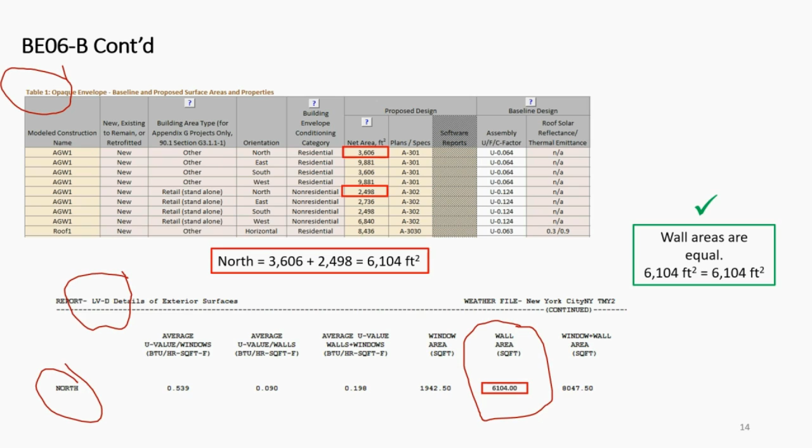We can check this with the LVD report by summing to arrive at the total north wall area. Then we check our LVD report for the north wall, and we check the wall area, which matches what's in the compliance form. So this check is all good, and the submitter passes.

Our next category is interior lighting. For interior lighting, we're going to do a check where we examine whether the proposed lighting power in the compliance form reflects design documents. So a check of the compliance form versus the design.

Then we're going to do one of the checks where we inspect the submittal to determine if mandatory requirements in 90.1 are met, which is a prerequisite for compliance with the standard for Section 11 and Appendix G. So we're going to check that for lighting controls.

Then we're going to do one of the checks, check of type number 6, where we look to see if the modeling output reflects the inputs in the compliance form. So we're going to check to see if the interior lighting runtime hours of the baseline are realistic.

Okay, the first lighting check that we're going to go over is LI02-P, and it's looking at whether the proposed lighting power reported in the compliance form reflects the design documents for spaces where lighting is fully specified.

Our review tips tell us to refer to the helper table in the interior lighting section on the quality control tab to help us identify lighting fixtures with the highest total wattage, and also to identify space types that account for the greatest total lighting wattage.

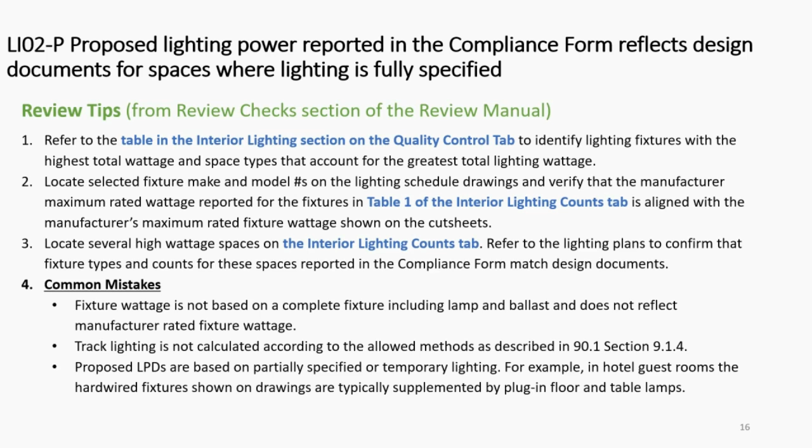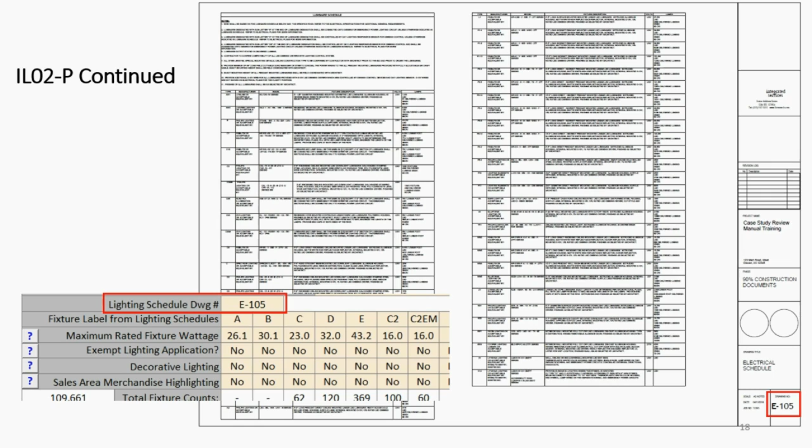So next, we go to Table 1 on the Interior Lighting Counts tab to find out where in the construction documents do we look to confirm the fixture wattage. And it gives us E-105. So we open up the design documents and find that drawing.

And then we look for our fixtures that we're verifying. So we can see C2, and while we're at it, I'm checking the C2 emergency fixture as well. So we've got our fixture and the reported wattage here.

And then we have our lighting fixture schedule, which I zoomed into here from the design drawings, and we can see that the fixture wattage reported in the compliance form matches the design drawings.

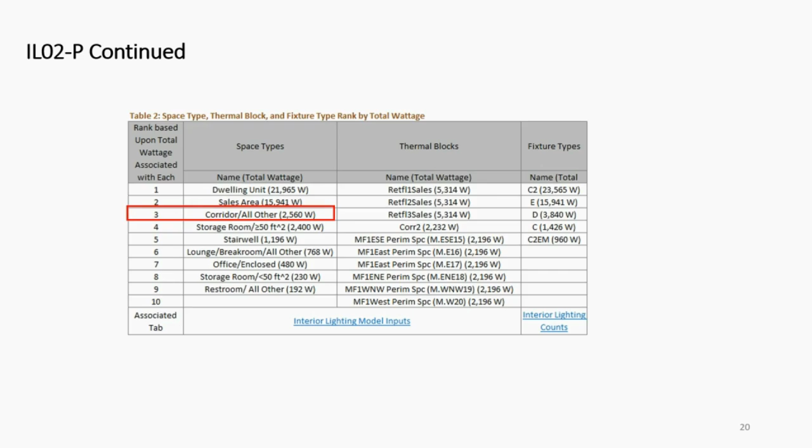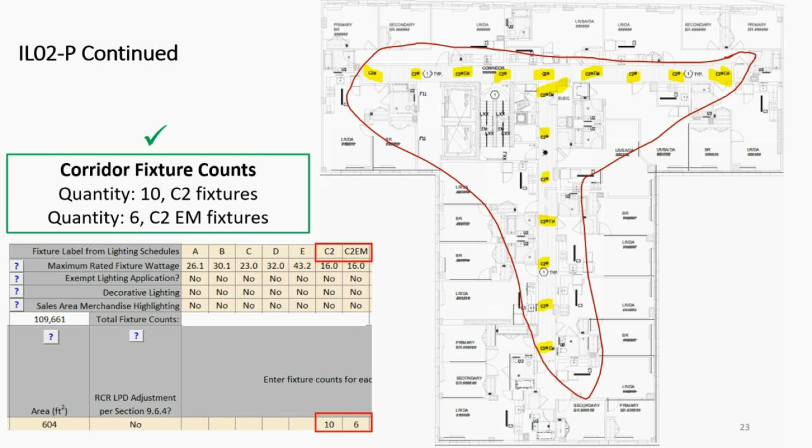Now you would of course do a few other checks in your sample, but in our example here, they passed this item on our sample.

Our next check is that the specified lighting controls meet mandatory requirements in 90.1, Section 9. Our review tip is to check Table 1 on the Interior Lighting Counts tab. All the mandatory lighting control requirements for each space are listed there, and it actually flags when a space is not in compliance. This check is performed automatically in the compliance form.

The red goes away when the user enters the controls that are compliant, that satisfy the mandatory requirements of 90.1. So we can immediately identify which spaces are not in compliance and ask the design team to correct this issue.

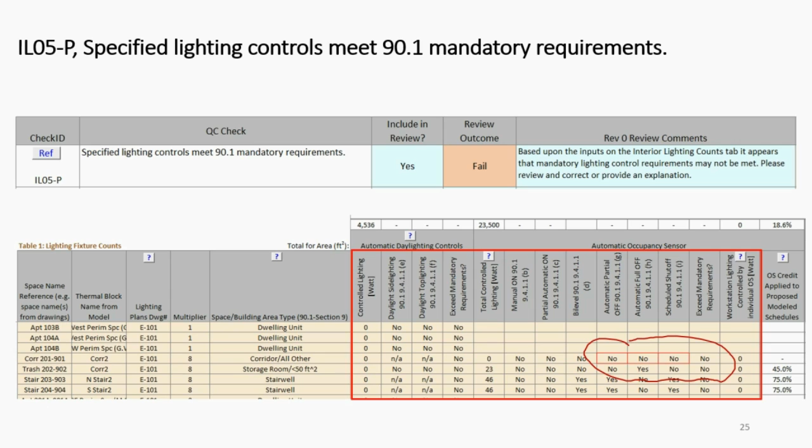So this is a check that the mandatory control requirements in the compliance form are correct. There's also a check to make sure these controls are consistent with the design documents. We're not doing that example today, but that'll be another check as well.

Now we'll do IL10-B, a check that the modeling output aligns with the lighting entered in the compliance form — essentially checking that modeled interior lighting runtime hours of the baseline design are realistic.

This check is automatically performed in the compliance form, and essentially the compliance form calculates effective full load hours, which is basically equal to the sum of the hourly schedule fractions in the model for a year. It takes simulated annual lighting energy in kilowatt hours and divides by the total lighting wattage from Table 1 on the lighting model inputs tab.

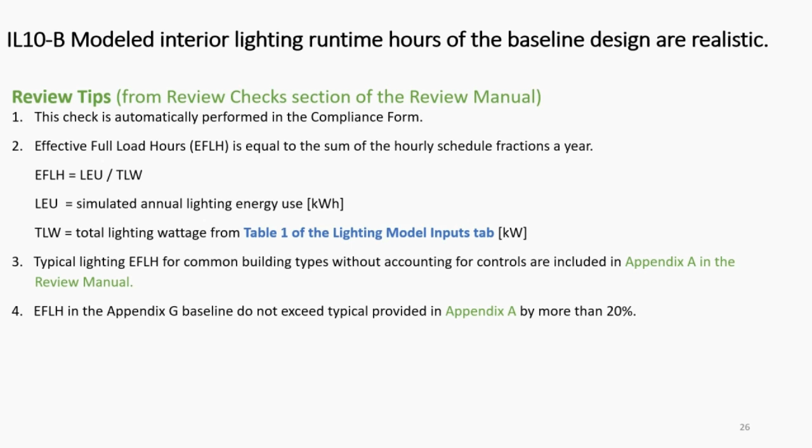The review manual has typical lighting effective full load hours for common building area types that don't account for controls, in Appendix A. This check compares those typical effective full load hours to the calculated effective full load hours, and as long as the baseline does not exceed those typical hours by more than 20%, it passes; otherwise it's flagged. There could be an explanation for the flag, such as irregular schedules that differ from the typical building of that type. An explanation can be provided, but if it's inadequate, this would need to be corrected.

As you can see, the values are quite close — they are definitely within 20%. So this check automatically passed in the compliance form, and there's no further action needed as a reviewer or as a modeler.

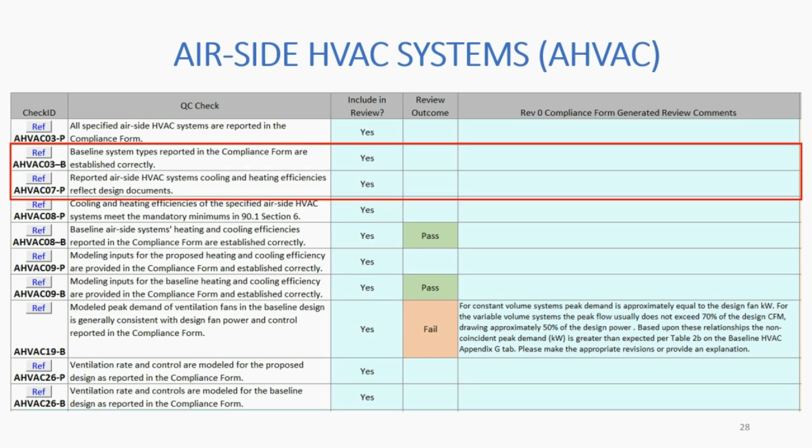Okay, our last category for today is airside HVAC systems. We're going to delve into two checks. The first, we're going to check whether the baseline system types reported in the compliance form are established correctly. And then we're going to do a check of the type where you examine whether or not the design reflects what's reported in the compliance form.

So the first check we're going to do, AHVAC03-B, that the baseline system types reported in the compliance form are established correctly. This is a very common issue that we see in reviews, so we wanted to do this for our demonstration. In our review manual, it tells us that baseline HVAC types are reported in Table 1A on the Baseline HVAC Appendix G tab.

So we want to do spot checks, sampling to confirm that the baseline systems are established correctly. We have some other tables in the compliance form on the General Information tab, the Interior Lighting Model Inputs tab, that can help us with determining what those modeled baseline systems should be according to the rules of Appendix G. So some common mistakes are that the incorrect baseline heating fuel source is modeled.

Based on the climate zone, Appendix G requires specific heating sources, energy sources in the baseline. For example, for System 9, in climate zone, let's say 6A, you're required to model gas-fired heating, whereas in climate zone 2, you're required to model electric. And we often see when conducting reviews that modelers will model the same fuel source in the baseline and proposed for system 9 and 10. So that's a common issue.

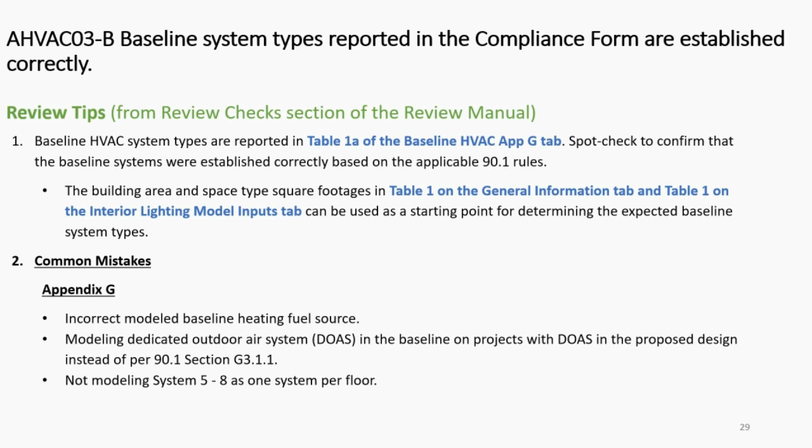And lastly, not modeling systems 5 through 8 as one system per floor as per Appendix G. So what often happens is that modelers will just model the baseline systems with the same number that are in the proposed. Because that saves time in terms of reconfiguring the model, but that's not per the rules of Appendix G. One system needs to be modeled per floor for those system types.

Our first step when determining which baseline system types are correct is to go to Table 1 on the General Information tab to look at the building area types, the square footage of each, and the number of floors. Once we gather that information, we go to Table G 3.1.1-3 to determine which of the baseline systems we would expect based upon the square footage, floors, and building area.

So first we've got multifamily, and so that's residential. We look at our table and we see for residential, we expect System 1 PTAC. Then we look at retail, which is another building area type. It is greater than 20,000 square feet, so it should be treated as another building area type when determining the baseline systems.

So we look at the table and we look at the retail row, but we see that it says retail and 2 floors or fewer. Well, our retail is 3 floors, so that doesn't apply. So we go to the next row, which is other non-residential and 3 floors or fewer and less than 25,000 square feet. Bingo, that matches our retail building area. So we would also expect system 3 to have been modeled.

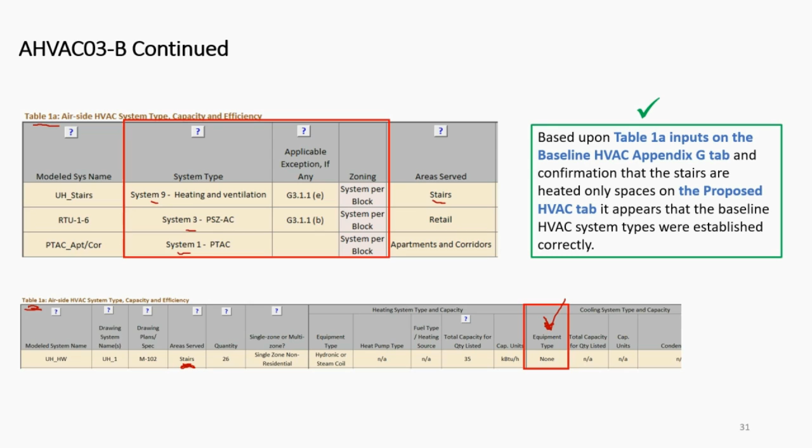And we see that System 9 applies to the stairs. So then we could double check whether that's correct by looking to see if they are in fact heated-only spaces. So we can go to the proposed HVAC tab, Table 1, and check out the systems serving the stairs to verify that they're heating only, and we see there's no cooling equipment for these systems.

So it's a check. The systems have been established correctly. Okay, the next check we're going to go over is AHVAC07-P.

It's to check whether the reported airside HVAC system cooling, heating, and efficiencies reflect the design documents. Our review tip tells us where to look for where this information is reported in the compliance form - that's Table 1A of the proposed HVAC tab. And we want to cross-check this with design documents for a sample of systems.

The review manual tells us that there is a table on the Quality Control Checks tab that summarizes the HVAC systems in the project and ranks them by various metrics. That table is shown on this tab, and it ranks the HVAC systems by heating capacity, cooling capacity, design airflow CFM, and the outside air associated with each. This gives us a basis for choosing the most impactful systems when conducting our review checks using a sampling procedure.

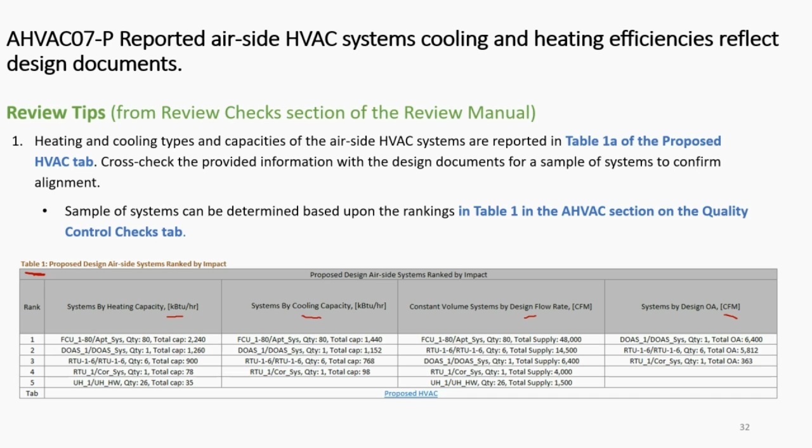Okay, so we are going to conduct our checks on RTU 1 to 6, and we go to the proposed HVAC tab, Table 1A, to find out where we look, because it tells us in that table which design documents to look at. So we pull those design docs, and then we check whether the reported efficiencies match the design docs. And in this case, they all do.

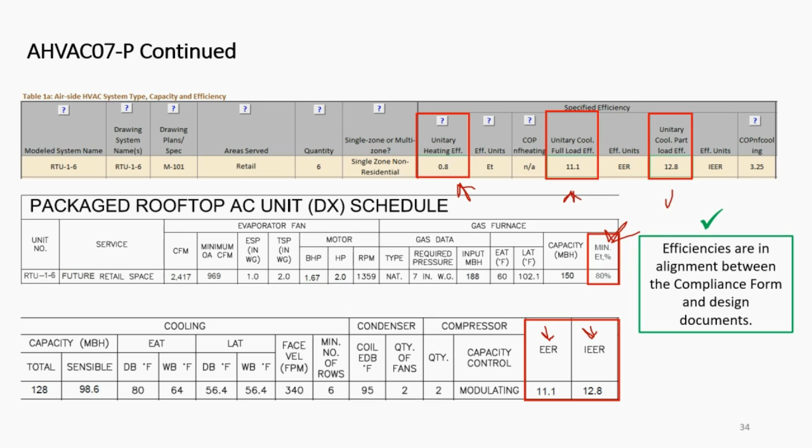So the heating efficiency matches both the units and the actual efficiency with the design documents. Then we check the cooling efficiencies here, and those units and values match the values in Table 1A. We have an 11.1 EER in the design docs, and a 12.8 IEER, and these match the reported efficiencies. So we are happy for this particular unit with this check.

Okay, that was our last review check demonstration. So this concludes the PowerPoint and compliance form demonstration of the training. Now we enter the question and answer session portion of the training. Thank you for your attention, and I look forward to hearing all your questions.